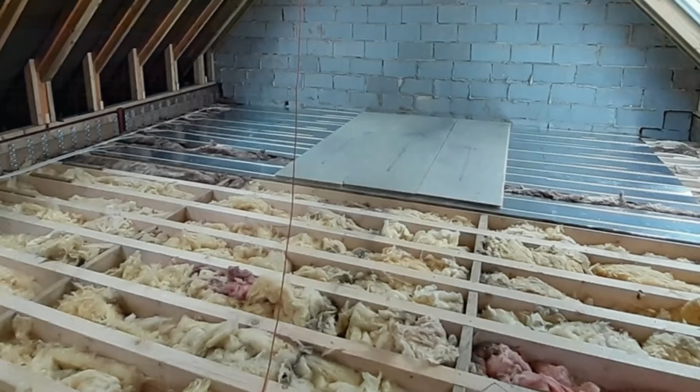Number 1. Know your attic. Houses come in all shapes and sizes and offer up various options for a loft conversion. Older period properties are best as they tend to have higher attic space, whilst homes built from the 70s onwards tend to have lower attic space and various forms of supports which can make a loft conversion more problematic and expensive. As a general guide, you need a minimum height of around 2,200mm between the ceiling joists and the highest point of the attic space. The higher the attic space, the more options you have for a great loft conversion.

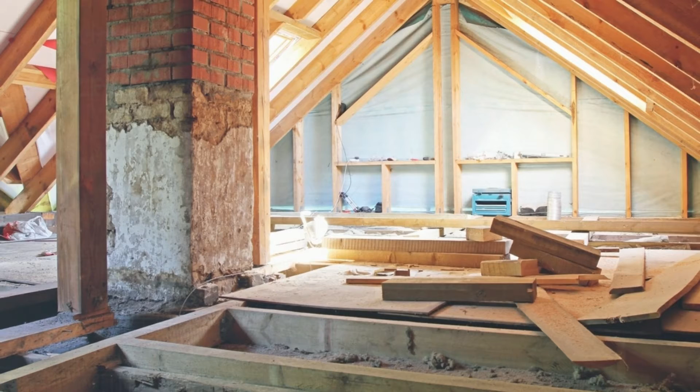Number 2. Get to know the different kinds of loft conversion. The style of your property will determine which type of loft conversion is suitable for your property.

Velux loft conversion. This type of conversion got its name from Velux, the roof window manufacturer. It's the cheapest type of loft conversion as you don't interfere with the structure of the roof other than to add a few windows to the front and rear.

Dormer loft conversion. This is easily the most popular type of loft conversion. With this option you open up the roof slope to create a small or large dormer.

Mansard conversion. The mansard conversion is common on terrace properties where you build up the rear of both party walls and create a full width dormer. A mansard conversion makes the most use of the space available.

Hip to gable. The hip to gable conversion is applied mostly to semi-detached properties where the side wall of the house is built up to form a gable and a full width dormer is added to the rear of the property.

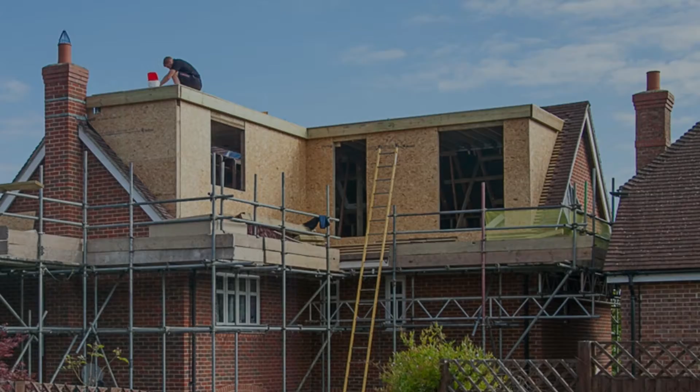L-shaped dormer. The L-shaped dormer is growing in popularity. This particular design adds a dormer to the rear of the property and also over part or all of the back addition. It's most suitable for period properties.

Chamfered dormer loft conversion. This is a modern type of dormer loft conversion that offers up a chamfered shaped dormer, often finished in copper or sheet metal.

Number 3. Work out what you want to achieve from your loft conversion. Often when I go out on survey for a loft conversion, all I get told is that they would like a few extra bedrooms, with no real idea of who or how the bedroom will be used. A home office is a popular choice, as is a large bedroom with ensuite, whereas the more practically minded will go for 2 bedrooms and a communal bathroom.

Ideally, if you're thinking about a loft conversion, give as much thought as you can as to what you are hoping to achieve and the intended use of the loft rooms. As a designer, I tend to go with what adds the most value, which would be the 2 bedrooms and a bathroom.

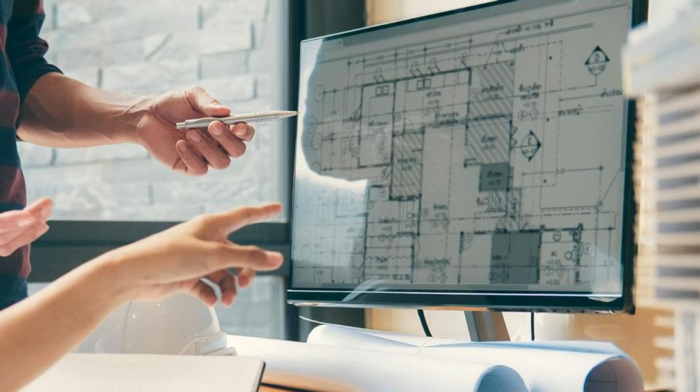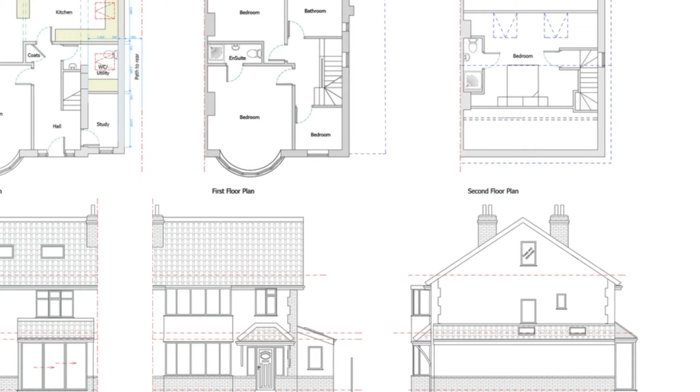Number 4. Find an architectural designer to create your design plans. Working with a professional designer will get you the best possible outcome for your project. In most cases there will be various options to consider, especially the staircase, and a skilled designer will be able to explain the pros and cons of each option and help you reach a conclusion on what is the best layout for the loft. A creative designer will also be able to show you how to reduce costs, add the most value to your property and guide you through the woes of planning.

Number 5. Create a mood board. A mood board has 2 main purposes. One, it will help you to refine your ideas. By gathering together photos, colours and materials that you like the look of, you will quickly get a feel of what you are after. Two, it will help to communicate your ideas to others. Usually a designer will help you to build a mood board by giving you ideas and offering suggestions.

From there you will start to develop strong ideas as to what you want and don't want. Because a mood board is a visual tool, it really does help to communicate concepts and visual ideas. A mood board is an essential part of the design process.

Number 6: Establish a budget for your project. Now would be a good time to establish a budget. Your designer will give you some rough costs, but all the decisions are yours with regard to the quality of the build and how much you are prepared to spend on fitting out. If you need to reduce costs, the designer will be the best person to show you how to get more value for your money.

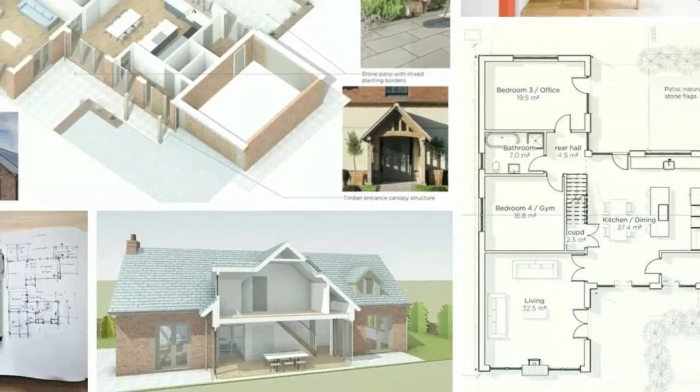Number 7: Submit the planning application. About 85% of loft conversions do not require a planning application, and your designer will advise you on whether your project needs one. Submitting the planning application is not just about completing a few forms and pressing submit. At Draw Plans we process about 50 planning applications each month, and if we didn't monitor or liaise with the appointed planning officers, most of these applications would fail. In most cases we have to negotiate, amend plans or deal with complaints from neighbours, so unless you really know what you're doing, I strongly recommend you leave the planning application submission to your architectural designer.

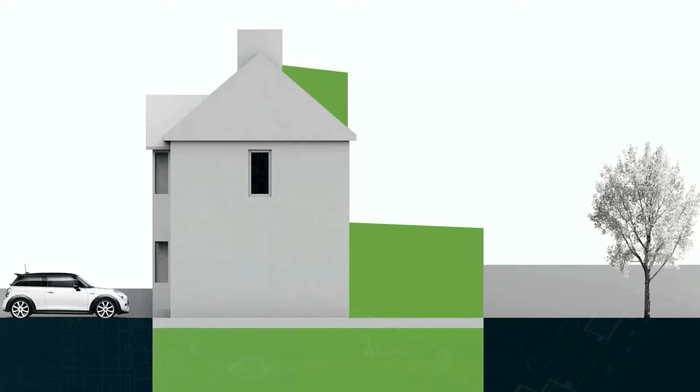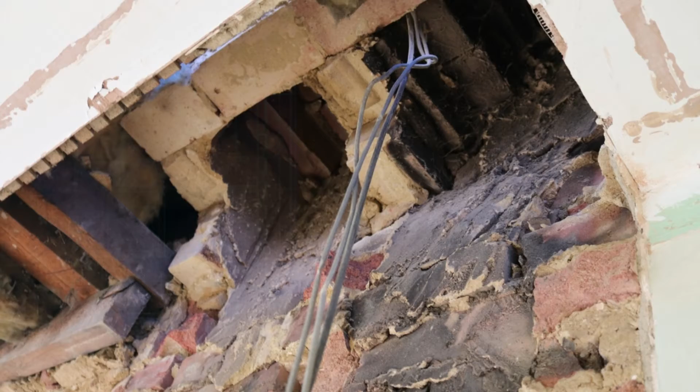Number 8: Deal with party wall issues. The only type of property that may not need a party wall agreement for a loft conversion is a detached property. All others will require a party wall agreement. If you have a terrace property, you will require a party wall agreement with both neighbouring properties. Under the party wall legislation, if you intend to carry out alterations to a party wall, such as removal of chimney stacks or insertion of a lintel or steel beams, you will need a party wall agreement with your neighbour. Draw Plans can help you serve the necessary notices and act as your party wall surveyor. Get in touch for further details.

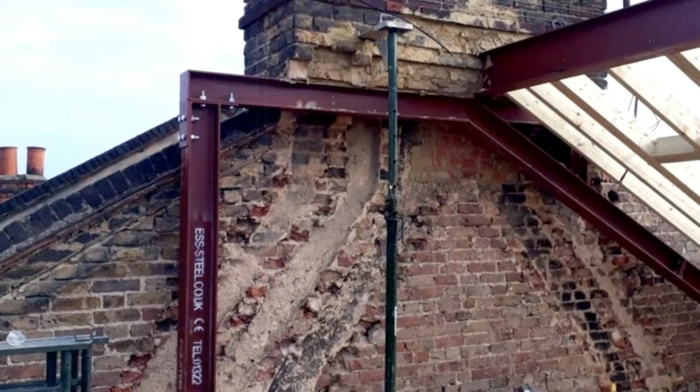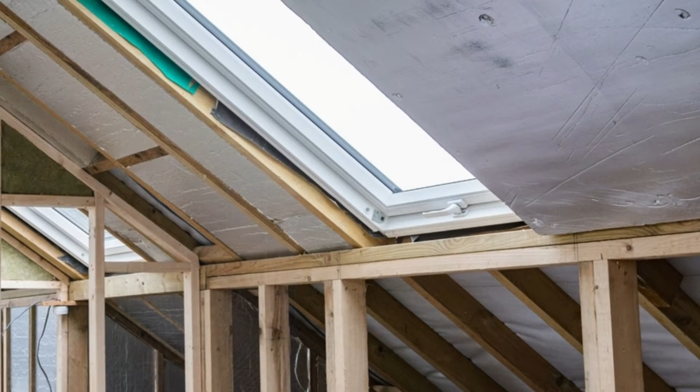Number 9: Building regulation plans for building control. Building plans for your loft conversion will be required by the builders and building control. They detail how you are going to build and let the builder know the technical specification for all the elements such as staircase, walls, floors, roof, doors, windows, drainage, ventilation, and most importantly, fire safety. They will also include all the information to ensure the build is done under the current building regulations.

Number 10: Structural design and calculations. All loft conversions require structural design plans along with loading calculations for steel supports, floor and roof structure, window openings, along with any structural alterations to the existing property.

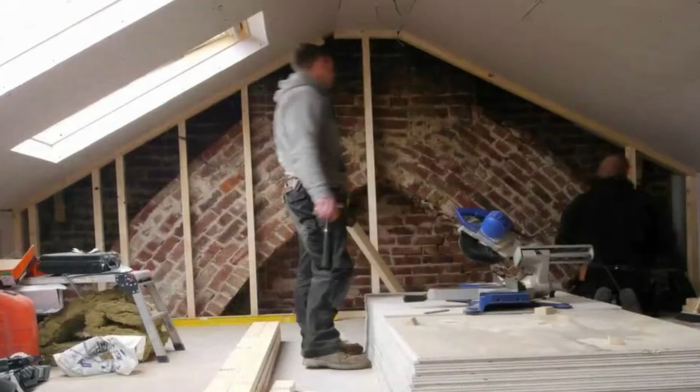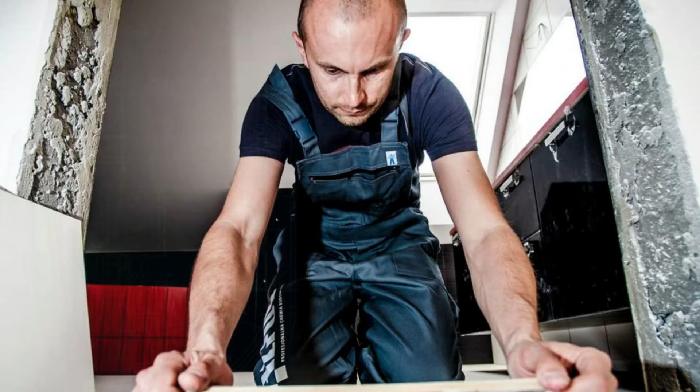Number 11: Decide your build route. When it comes to converting your loft, there are two main build routes. Option 1 is to give the whole job to one loft company, which means you only have to deal with one company. Option 2 is where you break down the job and hire different contractors and service providers for different parts of the job, and the scheduling will be down to you. Option 2 usually takes twice the amount of time than option 1, but you can save up to 20-30% of the build cost.

Number 12: Time to get quotes. This is where the project gets really exciting as you start to find out the reality of how difficult the tendering process is. Get at least 3 quotes for everything, and keep in mind that the quotes can vary by as much as 100%.

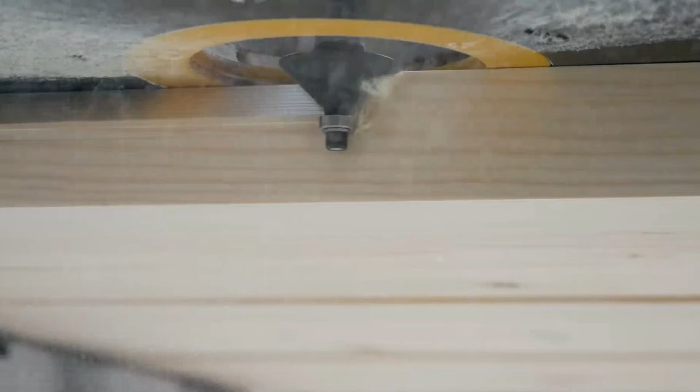Number 13: Choose your builder or service provider. Now comes the hard part. You now know what you're doing, you know how much it costs, so you need to instruct your builder or service providers. The key point here is due diligence. In other words, once you have decided who to instruct, make sure you do some research online about the person and the business. Check social media accounts and check out the address to see what comes back. Look for negative reviews on the business and make sure you read through existing reviews before you instruct.

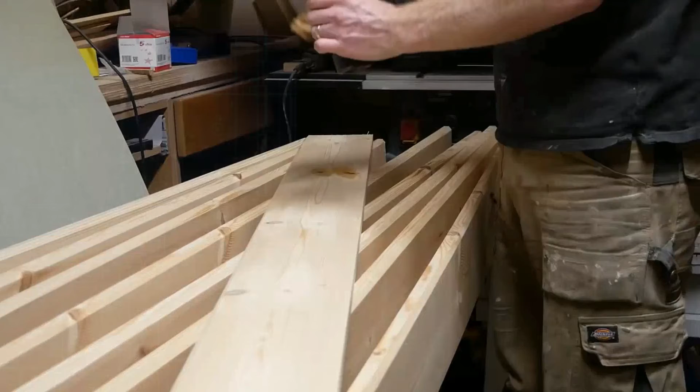Number 14: Scaffolding goes up.

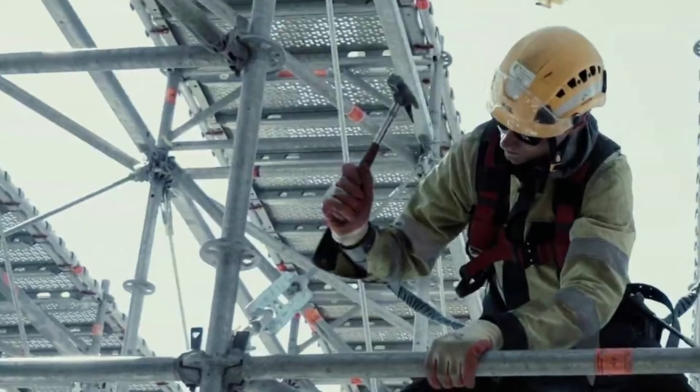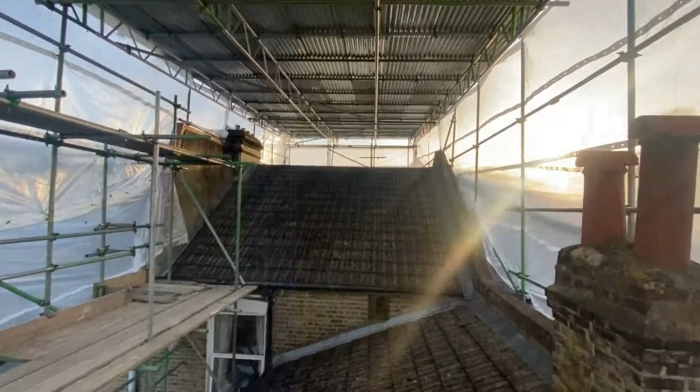All loft conversions will require the use of scaffolding to both front and rear elevations. It's important that access ladders are removed at the end of every day to avoid unwanted guests. You may also ask for a scaffold alarm to be fitted. You should also discuss with your builder the use of a tin hat to protect the property whilst the roof is exposed. A tin hat is effectively additional scaffold placed over the roof, covered with aluminium sheeting to stop the rain getting in whilst the work is in progress. Note that the use of the tin hat will add a few £1,000s to your scaffold costs.

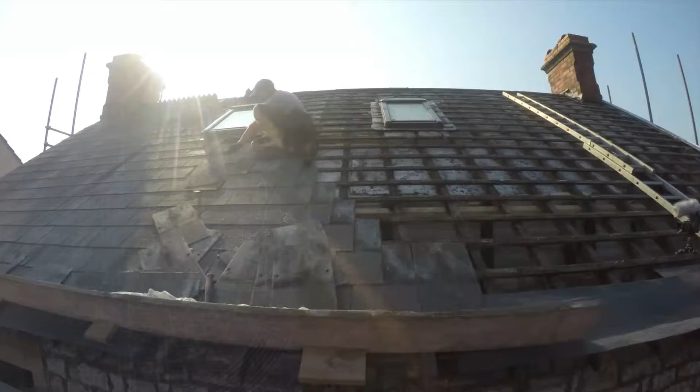Number 15. Stripping off the roof. When the job starts, the first thing the builders do is strip out the rear roof to get it ready for a dormer. In most cases, the old tiles or roofing materials will go straight to the skip. Any debris or rubbish in the loft will also go out through the roof opening.

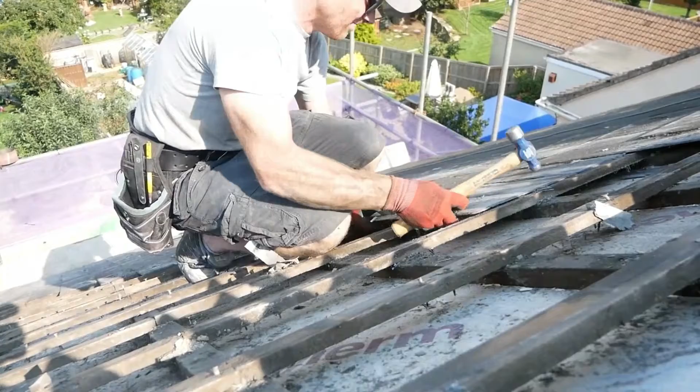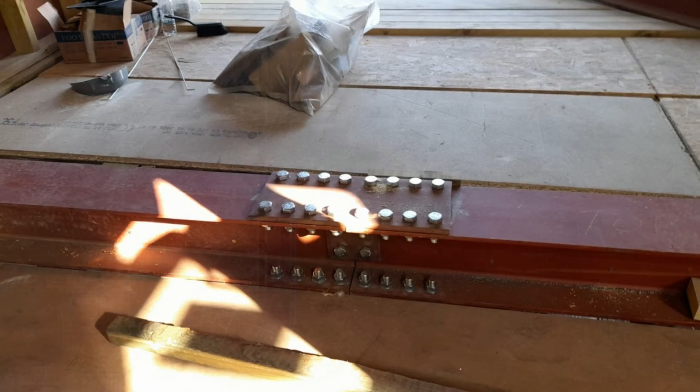Number 16. Structural steel installation. To install the steel beams, holes will have to be chased into the party wall and lintels or steel spreader plates fitted. This is noisy work, but thankfully it doesn't take too long. The steel beams are usually craned into the loft and brute force is used to move them around and to install.

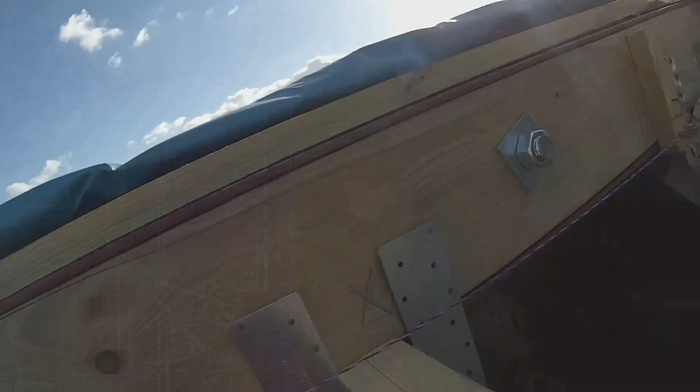Number 17. Constructing the dormer. In most cases, the dormer is constructed on site to the design as specified. Usually the side cheeks and face of the dormer are covered with tile or slate to match the existing roof covering. In some cases, the front of the dormer can lean back by up to 30%.

Number 18. Exterior windows and doors. The windows or doors to the dormer offer up loads of alternatives with regard to styling, shape and finish. My own preference is for a more modern finish with glazing to most of the dormer front. This usually means full height floor to ceiling glazed panels with windows or doors installed. If you go for doors, you will need a Juliet balcony added.

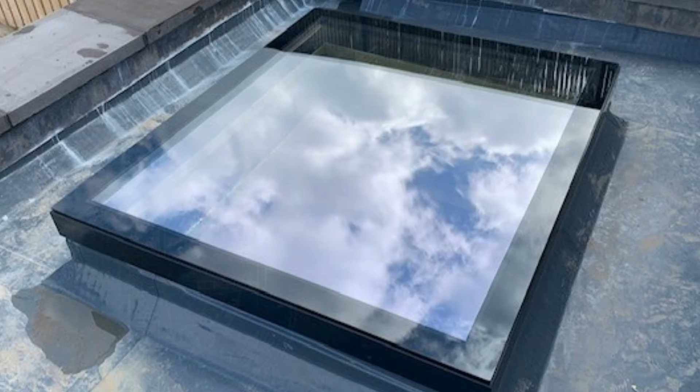On the front of the property, Velux windows are usually installed to bring in light to the front of the extension. When it comes to the new landing area, consider another roof window, a sun tunnel, or clerestory windows to get as much light as possible into the landing area and the top of the staircase.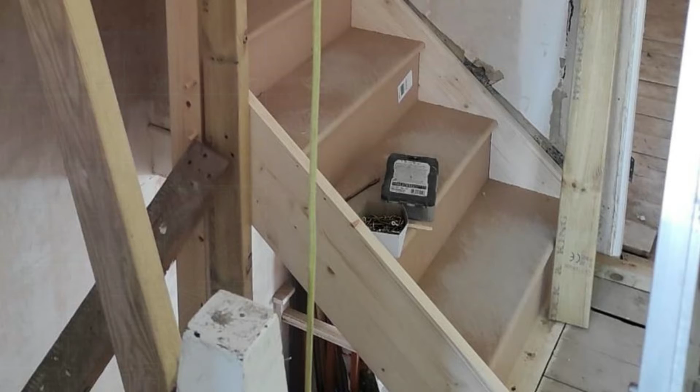Number 19. Staircase. Installing the staircase is hugely exciting because now you get to experience the flow of the house up to the attic rooms. You now have another floor, and if the work has been done well, a fantastic couple of bedrooms with a bathroom. At Draw Plans, when we designed the staircase for a loft conversion, we tried to keep it as open plan as possible. Rather than imposing an enclosed staircase at the top, we always tried to leave everything open and used handrails, newel posts, much the same as the floor below. Proper integration is a key element, and the designer should be aiming to make the new staircase look like it was always there by matching up the details as much as possible.

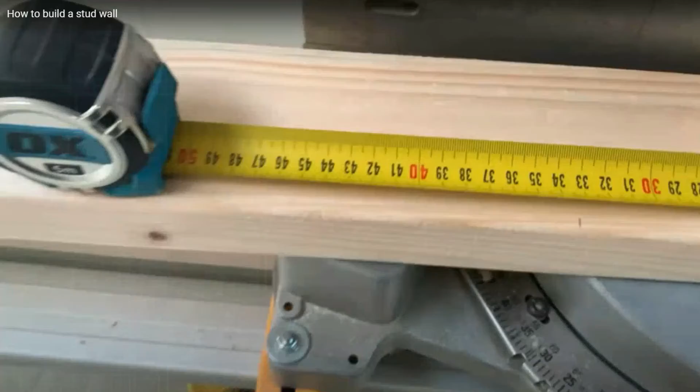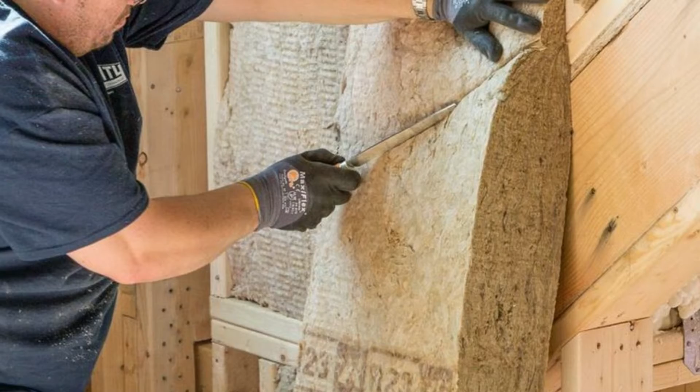Number 20. Stud work and stud walls. Timber stud walls are used to divide up the space to create the bedrooms, bathroom and lobby area. They are also used to block off the last metre or so going into the eaves to create a storage area from unusable space. Any chimney breasts usually get covered with stud work also. All stud work should be packed with insulation to dampen down sound transmission between rooms and to keep the rooms cool in summer and warm in winter.

Number 21. Dry lining and plastering. The party walls usually get covered with dot and dab plasterboard, so by the time the loft is ready for plastering, almost everything should be covered with plasterboard. All the walls and ceilings get covered over with plaster, so you will be looking at lovely new rooms by the time they are finished.

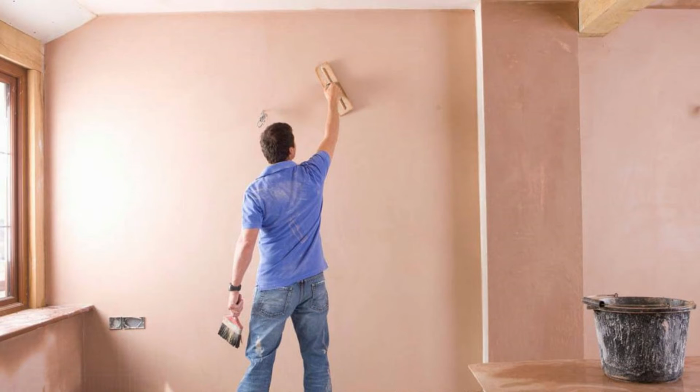Number 22. Bathroom. The new bathroom in the loft is an essential item, as by adding more bedrooms you need more facilities.

When designing a bathroom for a dormer loft conversion, my preference is to add a window in the roof. This means all the new walls are free to be used any way you want. A walk-in shower is also my preference, and where possible add a wall niche within the shower area and a water-saving shower head.

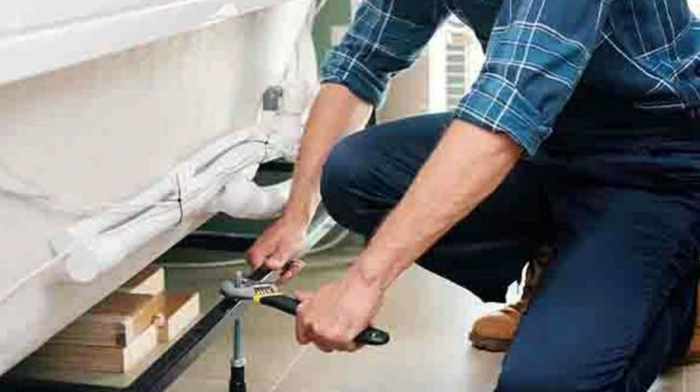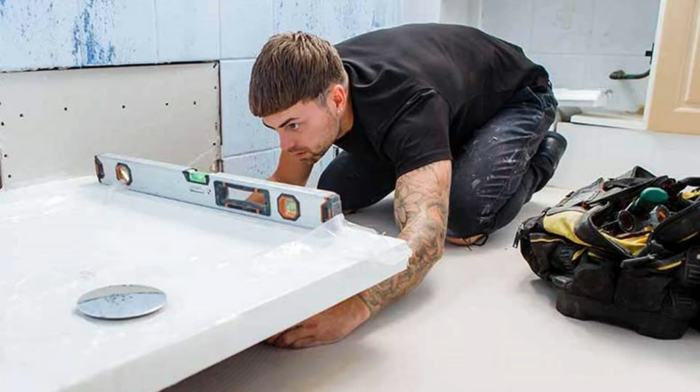Number 23. Plumbing, heating and drainage. There are various considerations when it comes to the plumbing, heating and drainage for the new loft rooms. Drainage is usually easy enough, as the new bathroom waste is directed to the extended soil vent pipe. Hot and cold water can be a headache, as your current heating setup may not be up to supplying an adequate amount of water to another bathroom.

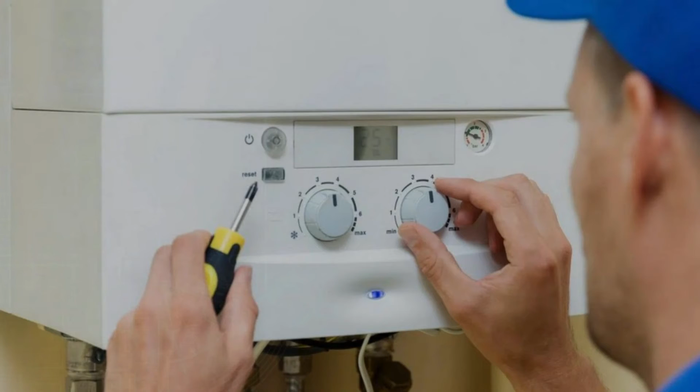A boiler upgrade and Megaflo may have to be considered. Water pressure may also be an issue, and you should have that checked in the early days in case you have to run larger diameter pipes in from the street. If the costs really are mounting, consider something independent for the new floor, such as a small combi boiler installation that will deal with the heating and hot water independently. Alternatively, consider electric heating, such as Dimplex panels for each room.

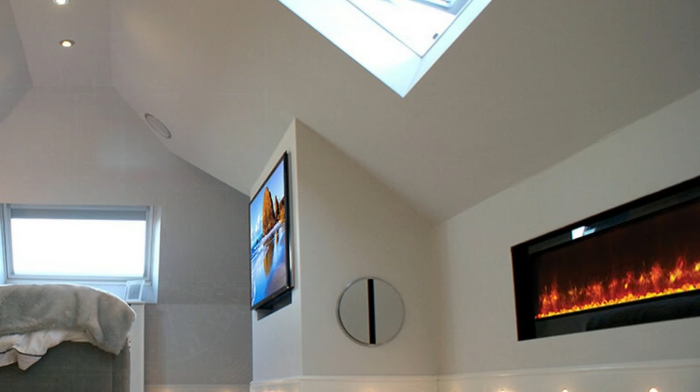Number 24. Electrical and lighting. Low voltage recessed lights are very common for loft conversions, mainly because they fit nicely into the ceiling and they provide a nice streamlined finish. Use dimmer switches where you can to really control the mood.

You should also keep in mind that your broadband Wi-Fi may not reach up to the attic, so either you install a router booster or run a few Cat5e Ethernet cables. My preference would be to do both, so you're covered for all eventualities.

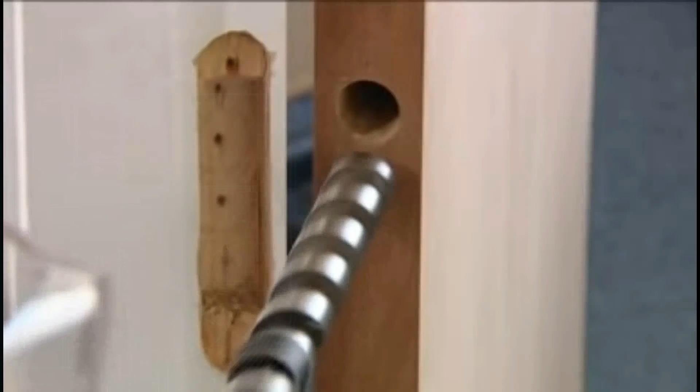Number 25. Joinery and fire safety. Once the carpenters start fixing the doors, skirting, door locks, etc., you really are getting close to the finish post. Keep in mind that the doors to the new bedrooms will need to be half-hour fire check with automatic closers. The same applies to all the doors to habitable rooms on the lower floors. All these doors need to be replaced with 30-minute fire check.

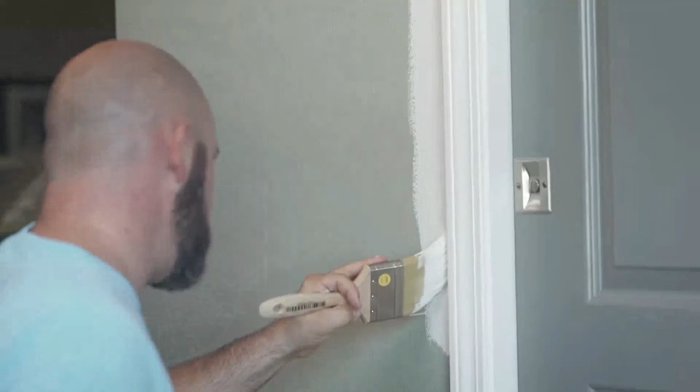Number 26. Painting and decorating. One of the best parts of the job is getting the paintbrushes out and getting the paint on. Many homeowners paint out the loft themselves to save a bit of cash, but if you have the budget, I always recommend that you leave it to the professionals.

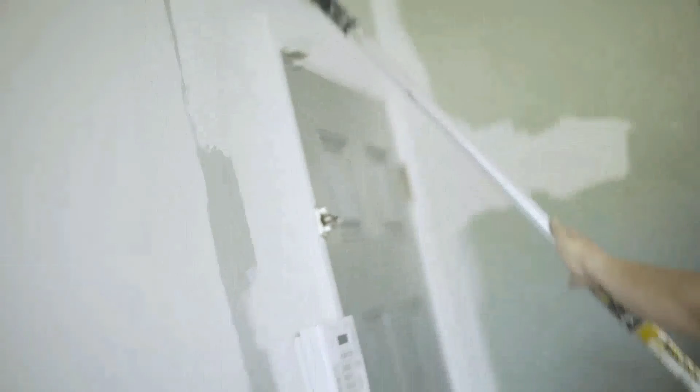Don't forget that the new staircase takes loads of time to make it look right, with umpteen coats of paint. Also, you have all those fire doors that need to be painted on both sides on the lower floors. Lots of homeowners paint out the whole hall and staircase to make everything match up and look great.

And the last item, number 27, finished flooring. Carpet still seems to be the most popular choice for the loft bedrooms, but occasionally we see the use of engineered flooring. A lot depends on what you have on the floor below, because you may need to match up or replace that floor also.

My preference would be carpets, to keep everything cozy. The engineered flooring will look great for the bedrooms, but sounds may transmit to the bedrooms below. At the end of the day, it is all a matter of taste, and how you wish to use the rooms will usually dictate the flooring finish.

Number 28. You've made it. You made it to the end, so hopefully you are now motivated to get your loft conversion underway as soon as possible. It's not rocket science, but it can be a daunting and challenging experience to convert your loft, so the more prepared you are, the easier it will be to manage your project. It is my sincere wish that you find our guide helpful and that you use it to navigate your way to creating a stress-free loft conversion that all the family can enjoy for many years.